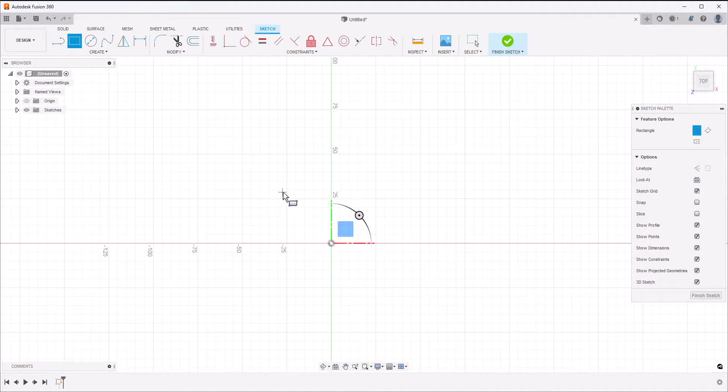So now we'll start with the base part, and for that I'm going to select this sketch tool and select this plane right here. Let's make a rectangle, actually a square of 60 by 60 size, in such a way that this remains exactly at the center.

For that I'll type D for dimension, or you can click here to start the dimension tool, and add the distance here 60, and this distance is 60. Then you can select this one as 30 and this distance as 30.

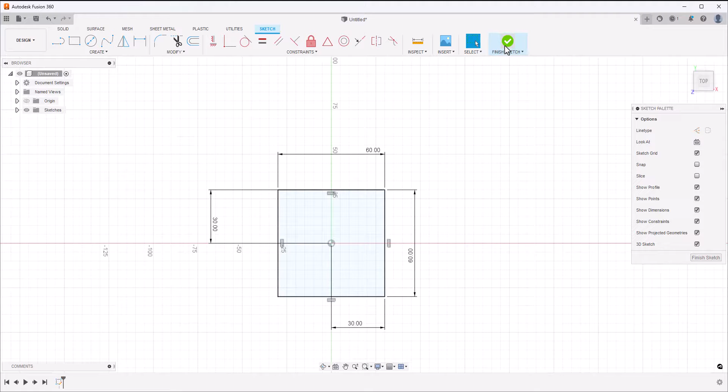Now in this case I'm using mm as the unit, but if your unit is not set, you can go to your preferences right here, and from the default units go to design and set your unit to whatever you want. I've already set it to mm, so I don't need to do anything else for now, and with that I'll select finish sketch.

Now I'll select extrude, this feature up to a distance of 20 mm, and I'll also add a taper angle of 10 degrees, and this should taper outside, which it is already doing, so that's it.

With that, click OK. Now the next feature which I need to add is fillet, so I'll go to fillet and add all 4 fillets on these edges. The radius is 5 mm, so 5, tab key, click OK, done.

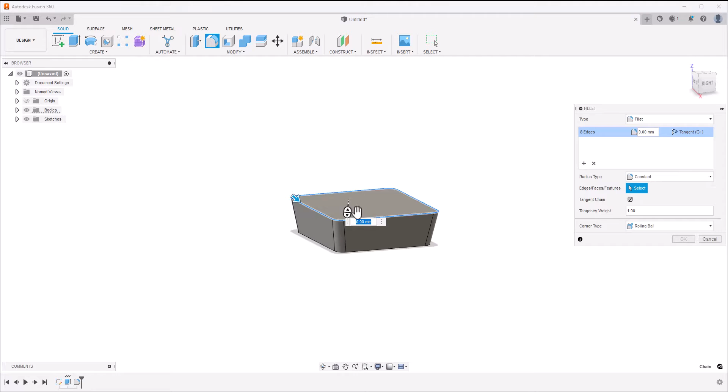Let's add one more fillet. So I'll go to fillet, and this is the edge, and the radius is 2 mm this time, click OK. Now the next one is another feature on this plane.

So go to this plane, create a sketch, and make the same type of rectangle once again. I'll just select it and make it like this.

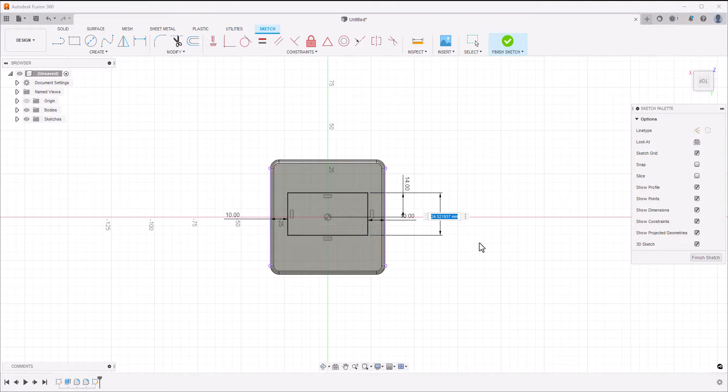Now I'll select D for dimension, and add a distance from this point to this point, and that should be 10 units. The same distance from this to this, I'll make it 10 units. Now I'll add the second distance from here to here, and that should be 14, and this entire I'll make it 28, and this will remain centered with all these values.

Finish the sketch, and now extrude this again. I'll select this feature and extrude it to a distance of 2 units, so distance is 2, and press the tab key.

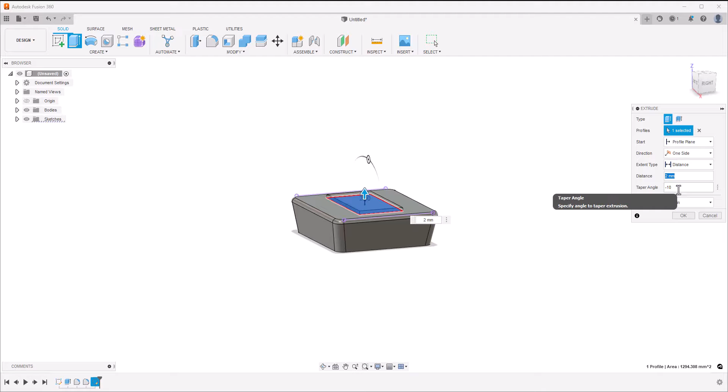Now the taper angle is once again 10 degrees, but this time it should taper inside, so -10, and there we are. Now join feature is selected, and with that click OK, and we have this added.

Now with these 2 features added, we are ready to create a shell feature here. We want to add a thickness of 2 mm on these walls, and for that I'll use the shell tool, but before I do that I'll add some fillets.

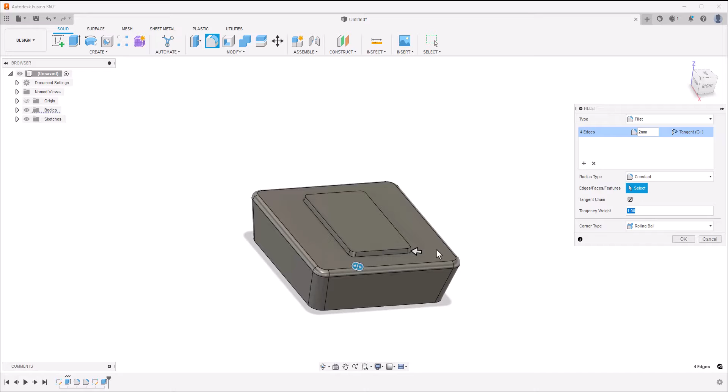So I'll go to fillet and add a fillet on all these 4 edges. And the fillet is 2 mm, so I'll type 2, enter, and then click OK.

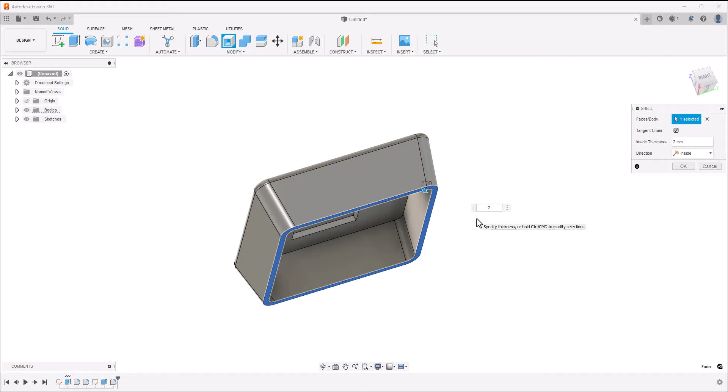Now the remaining fillets can be added later, but for now that's sufficient, and we can now add the shell feature. So I'll go to modify, shell, and select this face only, and the distance is 2, so 2 mm wall thickness, and here is the shell feature. Click OK and done. So now it's added.

We'll add another one right here. So we need to make a round cut. I'll go to sketch, select this plane. That's not selecting it, so press and hold your left click, and now it's going to show all the hidden features, including the YZ plane that we need to select.

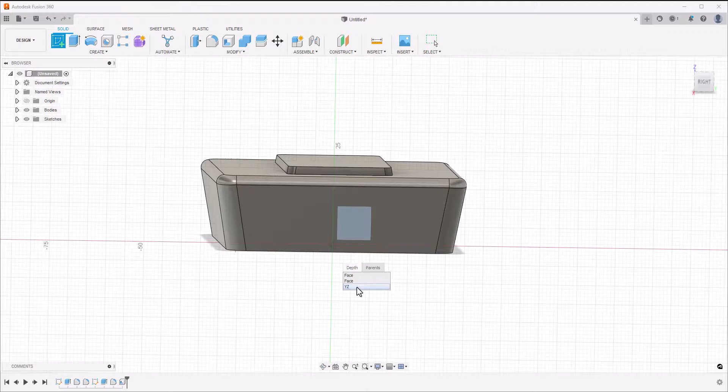Now select the circle, make it right here, and the diameter is 30. So let's just make it 30, finish the sketch, and extrude. Now this should be extruded on both sides, though I'll just extrude it here. You'll notice that it is making a cut.

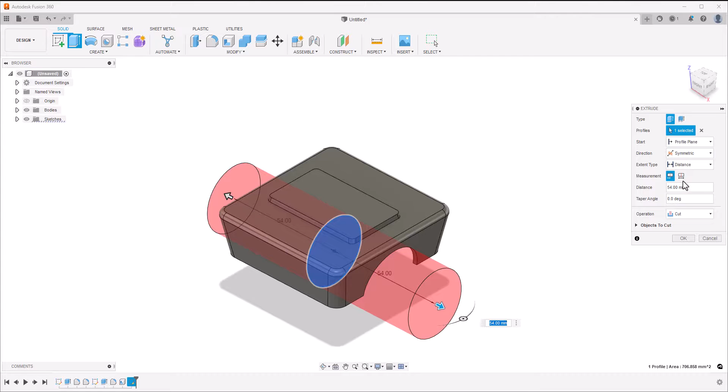Let's just extrude it on the other side using this symmetric feature. So in the direction I've selected symmetric, now it's making the cut on both sides. You can select any distance that just goes beyond this last plane. I'll leave it at 54, and with that I'll click OK.

And we are done. Now we need to add the feature here at the top. For that, I'll go to Sketch and select this plane. Press and hold left click, YZ plane, done.

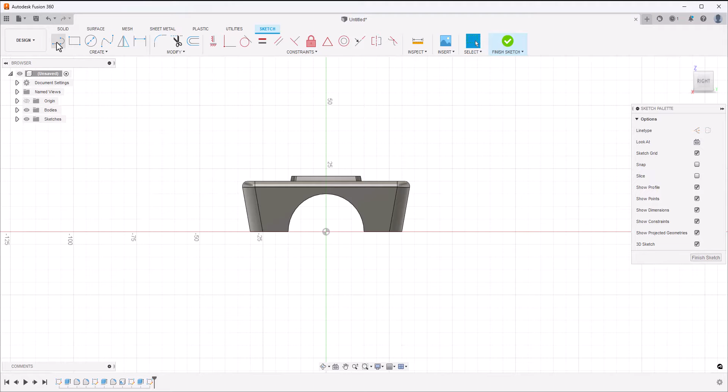Go to Sketch and start making it. So from this point, right about here, I'll add a line, add one here, and simply join it with this. Now I'll make a circle as well right here, small enough like this, and I'll also delete this line.

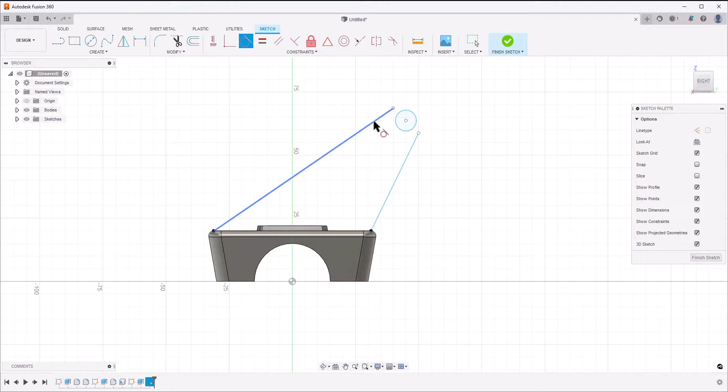Let's make this line and circle tangent, and make this line and this circle tangent too. Now I'll extend it further so we can trim it properly, select trim, trim this, this, and this. I'll go to circle and add another one right about here.

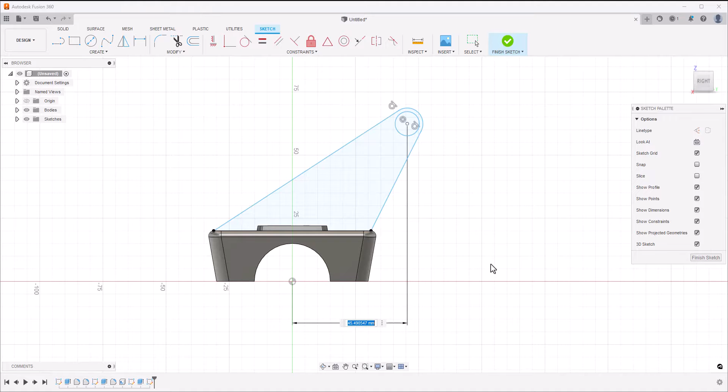Okay, so the outline is done. We just need to add the proper dimensions. I'll type D, and this distance from this center to this one should be 42. Then we have the first angle from this to this, which is 30. And then the angle from this to this, that's 120. All right, so we've got all the angles set.

Now we just need to add this circle diameter. I'll type D, and that should be 8 units. And we are done. So with that, this feature is completely constrained. As you can see, it has this black color, which indicates it's fully constrained. Now we are ready to extrude this.

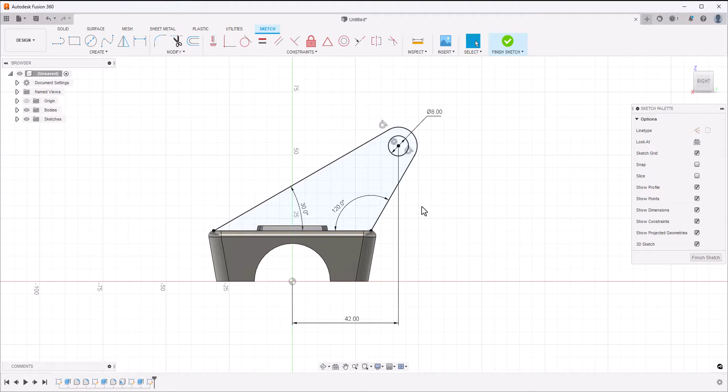So go to Finish Sketch, and now extrude this feature. We need to extrude it on both sides, so go to Direction, select Symmetric, and the distance is 10 units on both sides. And also, as it is making a cut, we don't want that, so select Join and click OK, and we are done.

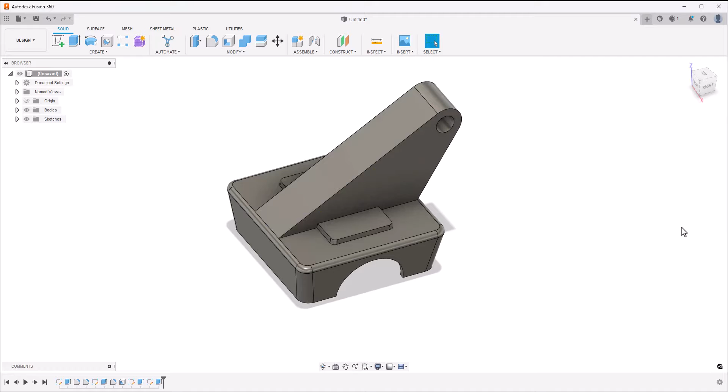So that feature is now added. Now we need to add some details on this feature. So I'll select this plane now, go to Create Sketch, and I'll just create some sketches.

Though we can make offsets of these lines because we just want to create sketches along these lines, I think it's easier if I just select the lines instead. So I'll select lines like so. Now I'll select parallel and add it for these two. Well, now it is added.

I'll go to Create an arc, select 3-point arc, and select first point, second point, and third point right about here. We also need to ensure that this and this remain tangent, so I'll select and make them tangent. All right, so that is also done.

Not only that, we also need to ensure that the distance between this and this remains equal to this gap, so I'll add some distances. But before we do that, let's properly move this sketch right about here.

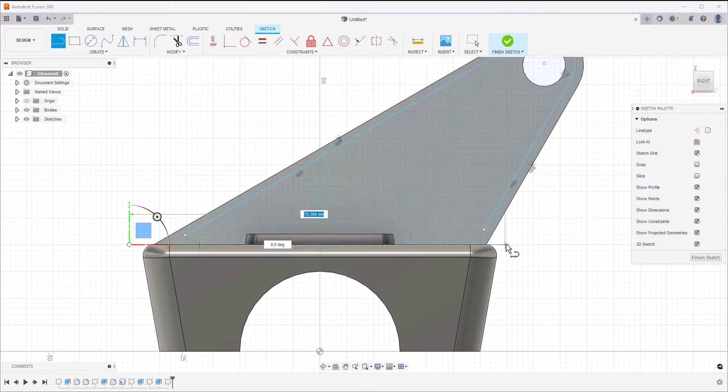Actually, we'll just make it like this, and I'll add another line along this. So here I'll just make a line long enough for this, and I'll merge it right about here, and merge it right about here on this line randomly. Okay, so that is now done.

Now I'll select this center, and maybe you can select this center as well, and make it coincident so they're exactly at the same center. With that, it looks like it is fully constrained, probably because of this midpoint. I'll remove this midpoint. There we are, so that we can add this thickness.

Now it's time to add that thickness value. I'll type D, select this, and this should be 1.6. And we are done, that's properly done.

Okay, so it's time to trim things. I'll go to Trim, and the first thing I'm going to trim here is this line, this one, this one. Now we want to keep this line outside, so I'll select this and trim it.

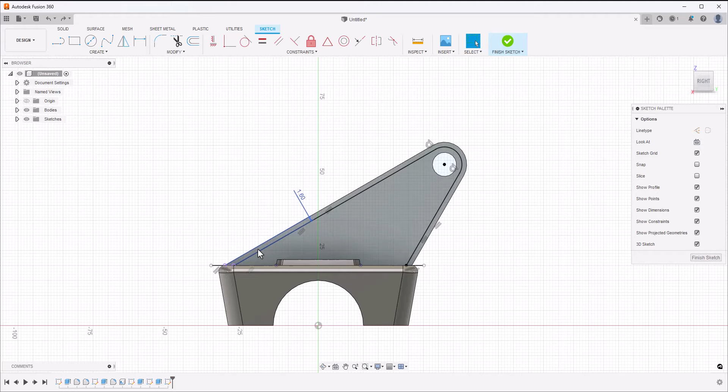So what we have is this set of lines, with this one going out and this one also going out. As we just need to remove this feature, we don't need to make it closed; we actually have the boundary we can use. If you want, you can trim it up to this point, but I'll leave it like that. And with that, I'll finish this sketch.

Now I'll go to Extrude, and if I hover my cursor here, it will automatically highlight that portion. There we are. I'll move it inside, and a distance of 5 units is what we need, and I'll select Operation Cut.

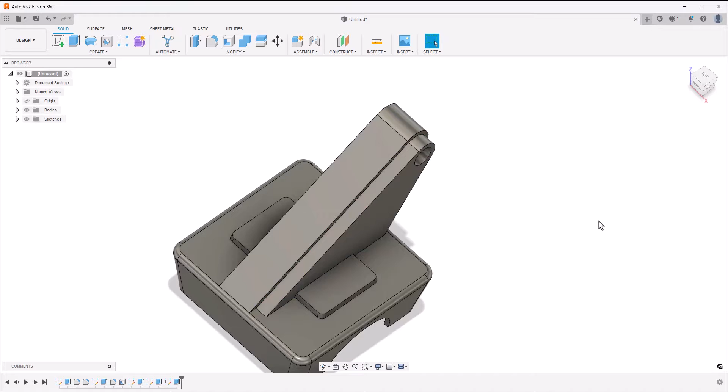Okay, done. Now we need to make a mirror image of this. I'll select the feature from here, go to Create, Mirror, and now the plane we need to select is the mirroring plane, which is this one right here. Click OK, and we have the same feature here, making the cut on the other side as well.

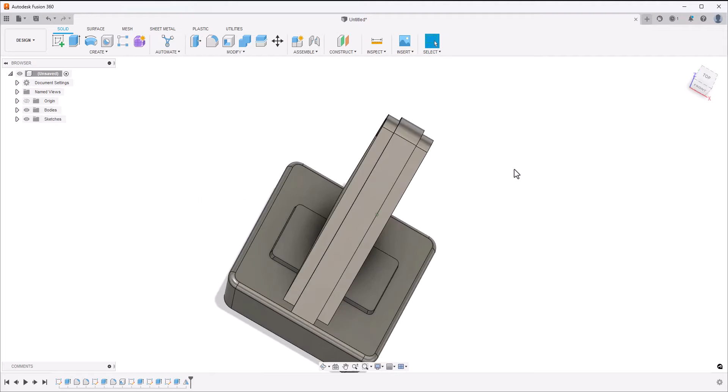Now the next feature. I'll select this plane once again and sketch. Once again, I'll start with a line, and make lines along this plane right about here, and then join it with this. Actually, this should be a straight line, but that's okay, we'll take care of it later. And we have another one here.

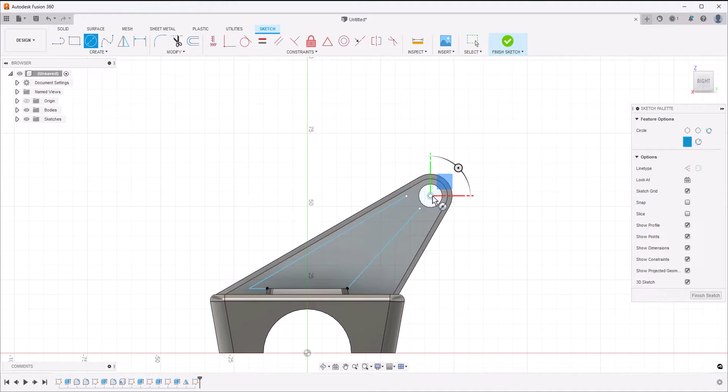And maybe we'll just move it like that. I'll go to circle, using this same center, and make a circle equal to this one. Then I'll make another line that joins this with the bottom plane right about here, and this should join this one as well. Let's go to trim and trim this part of the circle, and this, and this.

All right, let's select this line. Let's make it horizontal, and now we can make all the other lines parallel. So I'll select this one and this, let's just make it parallel. Select this and this, they should be parallel.

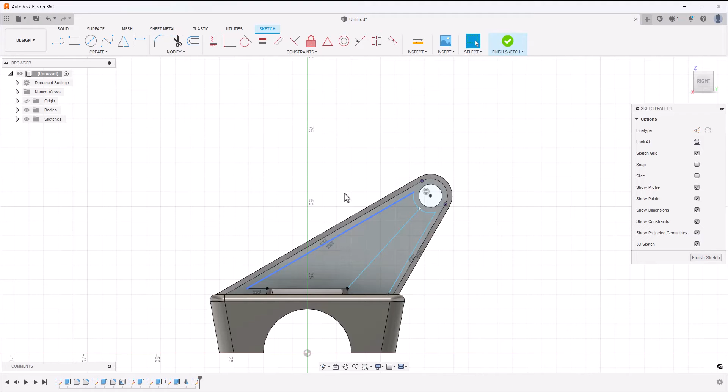Now here also we just need to add one more line. So I'll go to line and add another one, randomly, like so. I'll just make it somewhere here. Now these two lines should also be parallel, so I'll go to parallel and make sure that this and this remains parallel too.

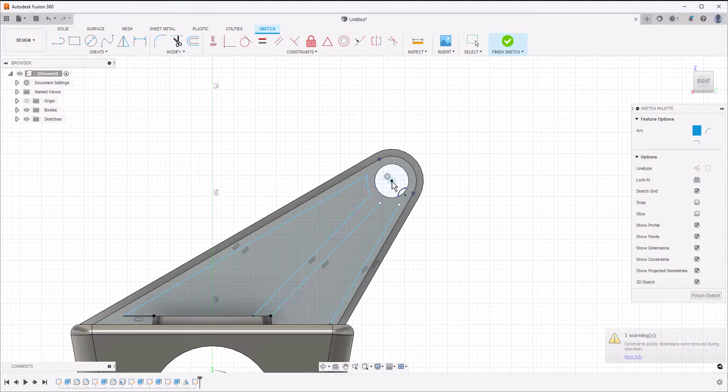Okay, now it's time to trim whatever is inside these two lines, that's about here. And it looks like we removed that part. That should not happen, so I'll go to arc and make a new one. Center point arc, here is the center, and then this and this, and done. So we've got this arc added.

So let's now add some dimensions here. I'll go to dimension, and the very first is this. I'll leave that with whatever the default dimension is, because it's following that curvature and I want to keep it that way. I'll leave it here for this one as well. Now this gap here, I'll select this, and the gap should be 1.6. This should be 1.6. And finally, this gap should be 1.6 as well.

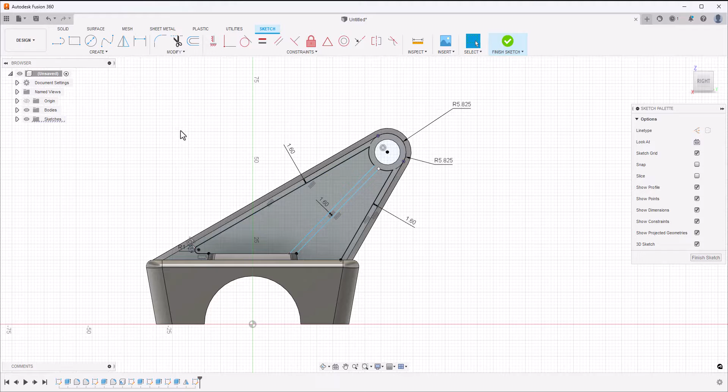Now we need a little bit of rounded corner here. For that I'll use fillet. So I'll go to fillet, and the first fillet is this. Now this one should be 1.2. There it is, so that's added. In a similar way, I'll add more fillets. I'll add a fillet right about here, that's just 1 unit. Another fillet of 1 unit will go right about here, and enter.

Now we also need to connect it with this. So I'll go to line tool, and I'll simply select this point, move it down and connect it here, so that it forms a completely closed loop, this one, and so should be the case for this one.

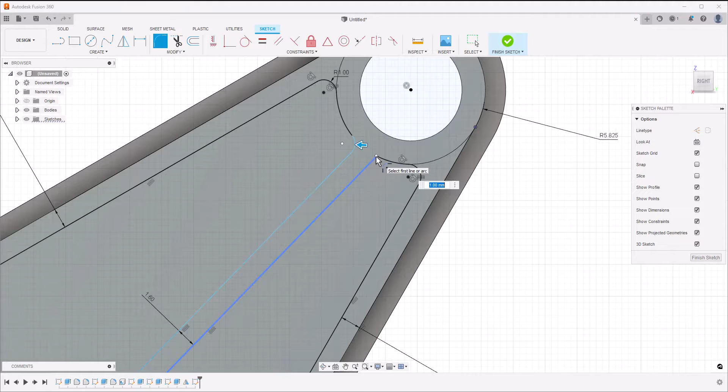Now with that done, I'll add fillet at one more location, right about here, and another fillet right about here. Now it looks like it's not touching it here, so we just need to fix that first. So I'll just touch it like this. All right, and now we can add the fillets. So let's go to fillet and add one here, another one here, and the radius is 1.2, and we are done.

Now the final thing that we need to add is the angle for this. So there is no set angle, so I'll type D and add an angle here like so, and this angle is 45 degrees. Okay, so with that our sketch is now finished, and now we are ready to extrude this feature.

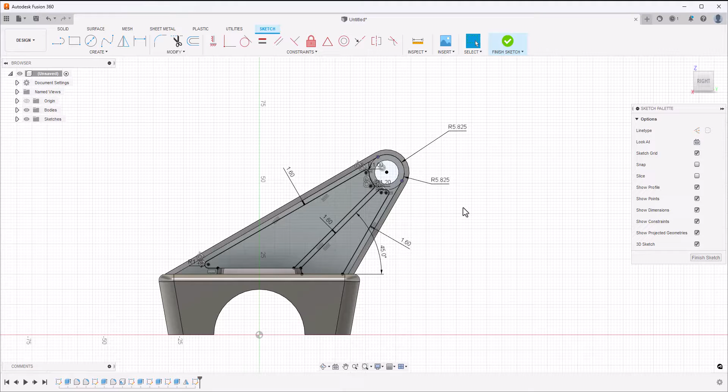So let's finish this sketch, and I'll go to extrude. I'll select this region and this region, and it should be extruded inside like so, because we are just going to make a cut. Now this distance is -8, because it's going to make a feature inside. Click OK. And now we are going to make another mirrored copy of this feature.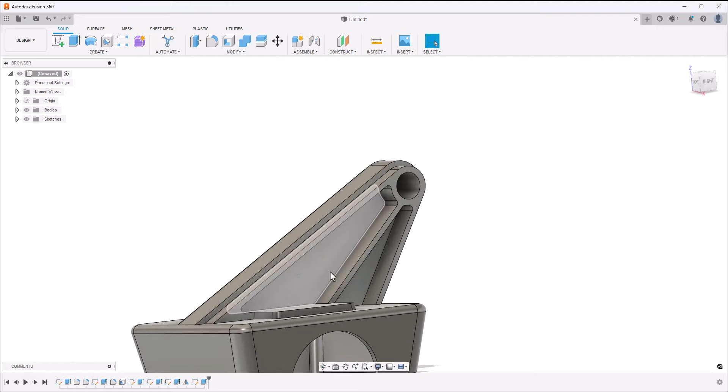So select this feature, go to create and mirror. Let's go to mirror plane, select this, and OK, and we are done. So the same mirrored copy is now here as well. So this part is almost done.

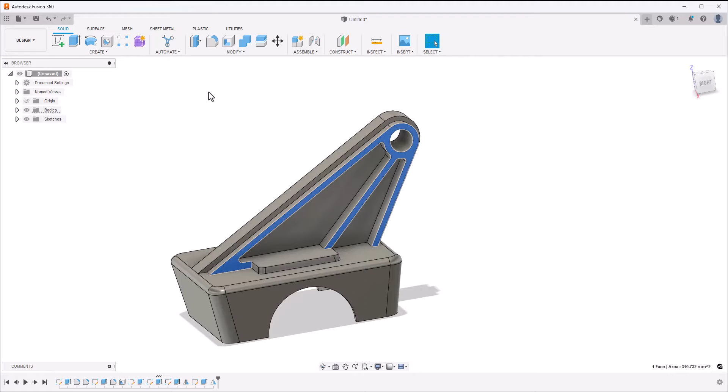Now finally, we just need to make an extrusion here as well. For that, I'll select this plane, and let's go to circle, and using the same center, I'll make another circle like so here. And then we'll select the same point, and maybe we can just make another one here, or you can use this feature as well, because that's just sufficient for making that circle.

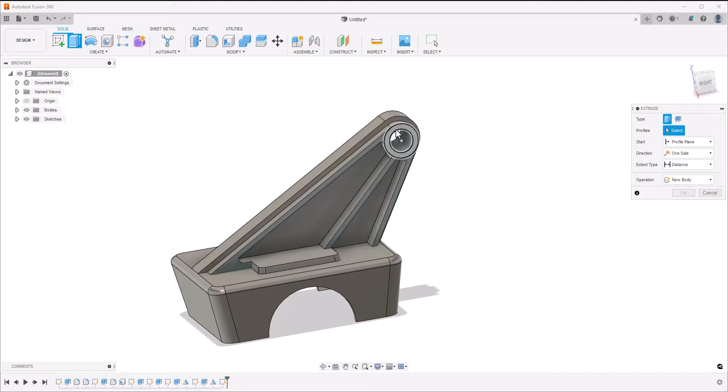So I'll just simply extrude this feature. Extrude, select this one, and as you can see, it will highlight that region, and we can extrude it outside like so. Let's add a distance of 5 units like that, and click OK.

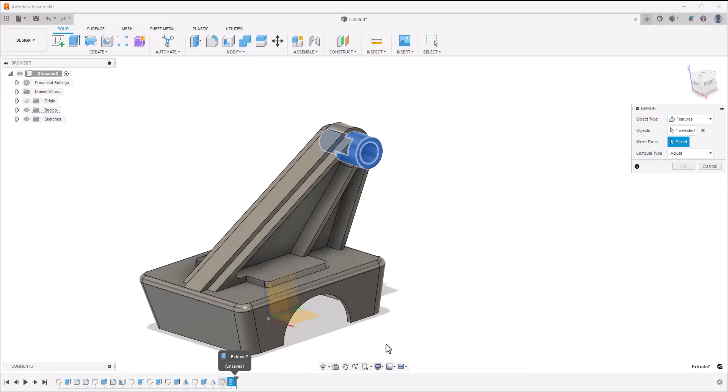Now I'll select the same extruded feature and extrude it on the other side as well using mirror. I'll go to Create, Mirror, select the last feature, choose this plane as the mirroring plane, and click OK. It's extruded on the other side as well, so that feature is added.

Now finally, we just need to make a few holes here. For that, I'll select this plane and sketch, then go to Slot and choose center to center slot. The first slot I'm going to make is right about here, and then we'll use this slot and make some copies using it as the reference.

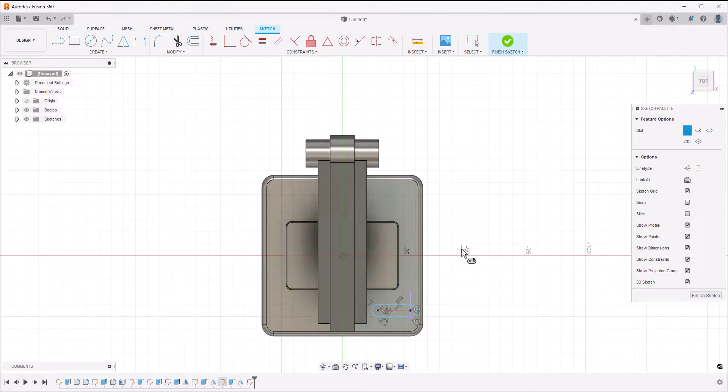I'll delete this line that we accidentally created and add the dimensions. This line length is 10, and we have a distance of 8 units here. We also need to add distance from the center line, which is not available right now, so let's add the center line from here to here. Select this line and select center line. All right, that's added, now we'll use it as a reference.

Actually, I finished this sketch, so I'll select it and edit sketch, go back and keep modifying it. I'll select this and this one, and it's adding the total distance, that's totally fine, we can add that too, so that should be 46. Again, add the distance, and this distance should be 5.2. All right, so there we are.

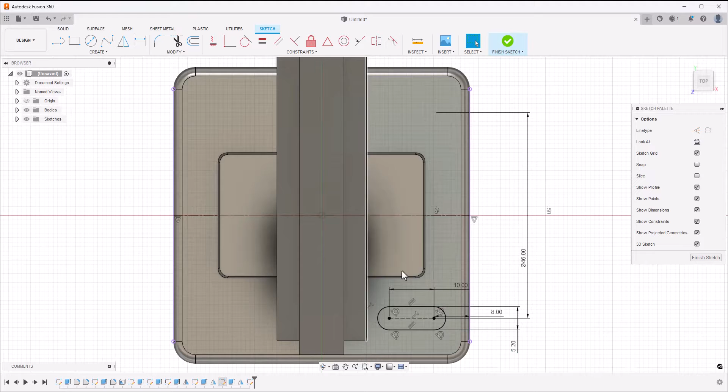We've got this slot, now we'll make a copy of it. To do that, simply select it, go to Mirror, select mirroring line, and select this one as the mirroring line, and you'll have the slot on the other side as well.

Now we need the same slot in horizontal direction, actually vertical in this case. So I'll go to Create, Slot, center to center slot, and add it right about here. Now all we need to do is add some dimensions, so I'll add the required dimensions for this slot, that's 10 units.

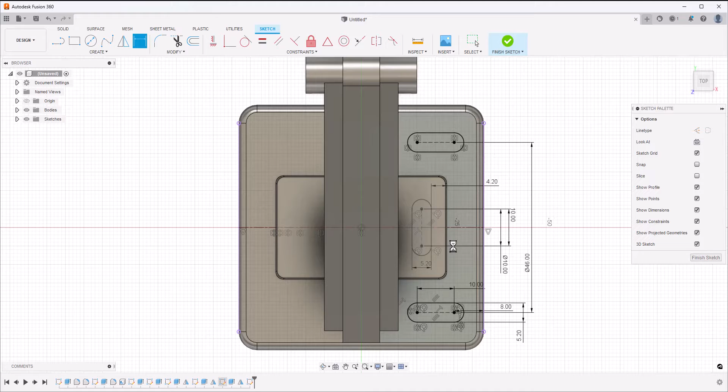I'll add this distance 4.2 from center line to this point. It should be 5, actually it's again taking the full length, so that's totally fine, I'll make it 10, and then the thickness should be 5.2. All right, so we've got this slot as well. Finish this sketch, and here we are.

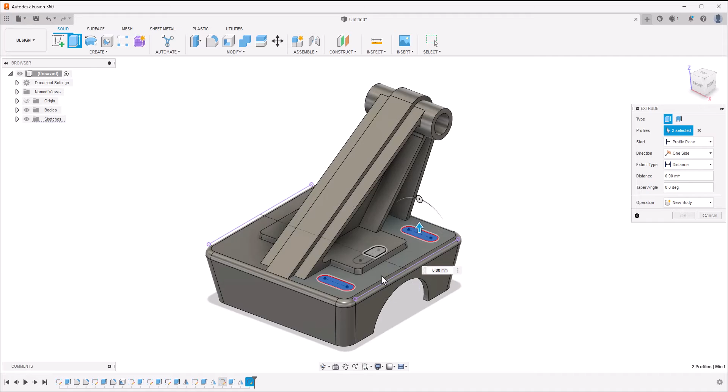Now let's make an extruded cut. I'll select this and this feature, and also this feature. As it's not allowing me to do that, I'll simply press and hold left click, and now it will highlight all the features, so we need this profile. Press and hold left click, select the profile again, and it's selecting everything. Now we need to select both sides, so first let's add it here. That's making the extruded feature.

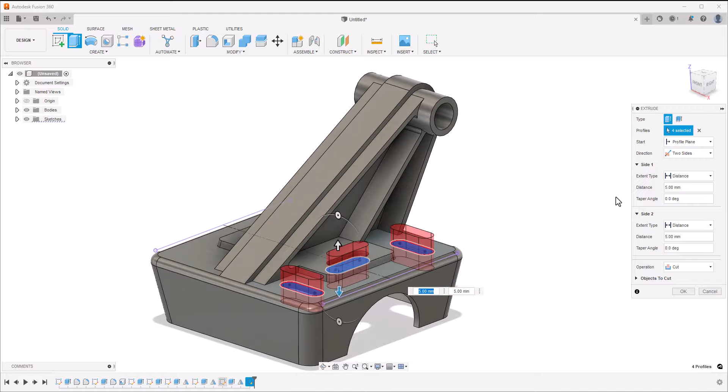In the direction, I'll select two sides so that we have the second arrow, and now I'll move it back, actually down. Now for both sides, we can add the references. For this side, I'll add To Object and select this, and for the other side, again To Object, and I'll select this plane. We are done, click OK. We have the cut feature.

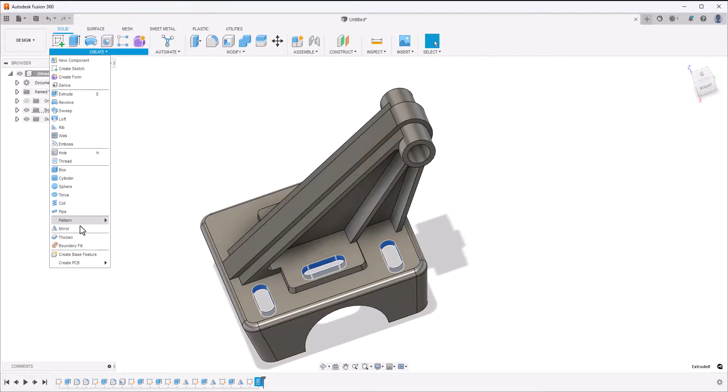Now, once again, a mirror image is required. So select the cut feature, go to Create, Mirror, mirroring plane, and that's this one. It will create the feature on the other side, which is like that, and we are done.

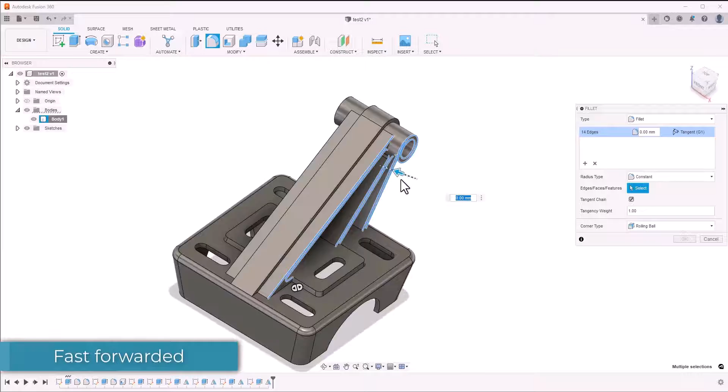Now all we need is a little bit of fillet on all the sharp edges. To add the fillets, I'll go to the fillet tool right here, select all of these sharp edges, and add a radius of 0.3 units just for this.

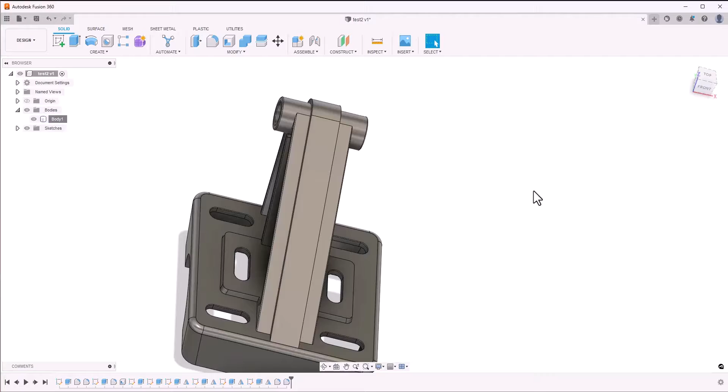Now in a similar way, I'll repeat the process with different radii for all these different features. This is 0.2 for the slotted holes, and finally for other details, this one is 0.5. And here we are, so with all the fillets added, this is how the part is going to look like.

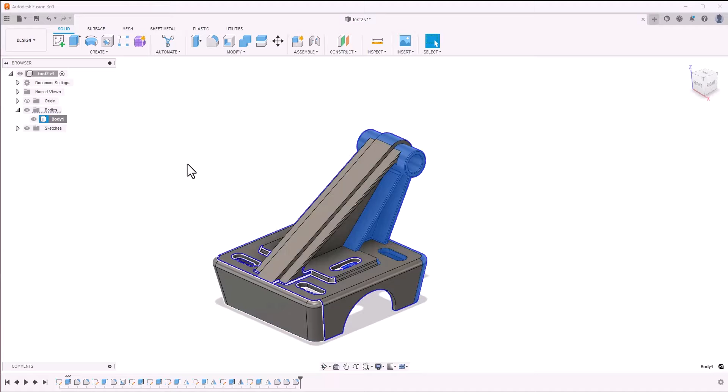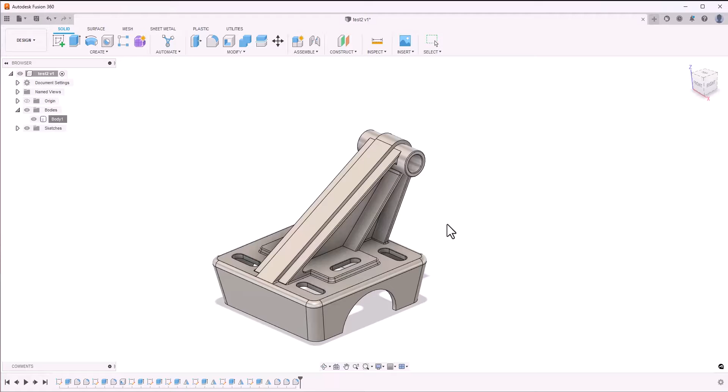Now, if you want to add physical material, you can do that as well. For that, simply go to Bodies, right click on the body, and select Physical Material. As this is a part made with die casting and aluminum is used, I'll use aluminum from the list. We have this entire list from where you can select metal, and what we need is aluminum. There are several alloys of aluminum you can use, but I just want to select a generic one, so I'll select this one, drag it and drop it here. That will not only give it a physical appearance, but also physical properties like mass and density. So that's how you can make this component in Fusion 360.